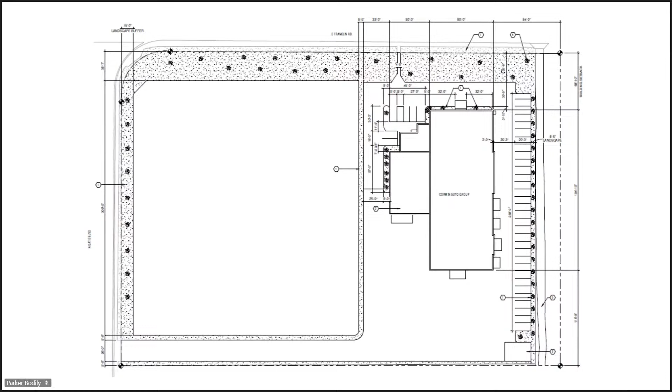I've already defined most of this for you, so I won't cover it again, but continuing on, performance standards - they're subject to our standard performance standards, which limit the amount of emission of smoke, fume, gases, etc. If they propose any additions to the building, it will go through design review.

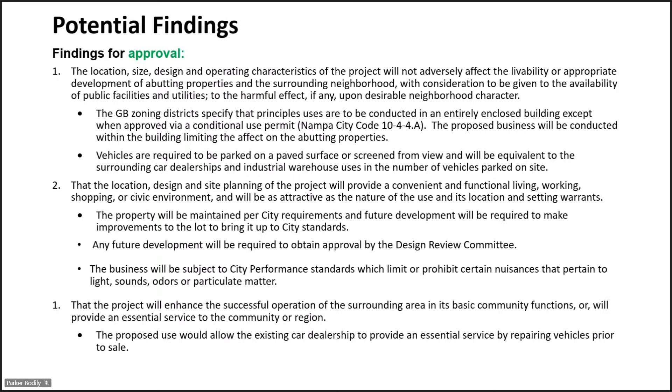The conditions of approval, as mentioned before, number 3, their proposed business will be restricted to the use described in their narrative provided in the staff report, which the applicant mentioned. The potential findings are in the staff report. Staff doesn't see any issues with the conditional use permit request.

Any questions? All right, we will move on to public testimony.

Karen, you have the sign-up sheet? Nobody signed up? Is there anybody here that would like to speak, or online, for, against, or undecided on this application?

All right, seeing none, I'd take a motion to close the public hearing. So moved. Second.

We have the motion to Cody. I didn't say anything. I thought you said something.

It's been moved and seconded to close the public hearing. All those in favor? Aye. Any opposed? All right, public hearing is closed.

What do you guys think? Seems like it.

Mr. Chair, I'll go ahead and make the motion. I move to approve the conditional use permit for automotive repair for Corwin Ford Automotive Reconditioning in a GB1 at 15970 Gate Boulevard, for Corwin Ford Family Real Estate LLC, with all the recommended conditions, and adopt the proposed findings as listed in the staff report. Second.

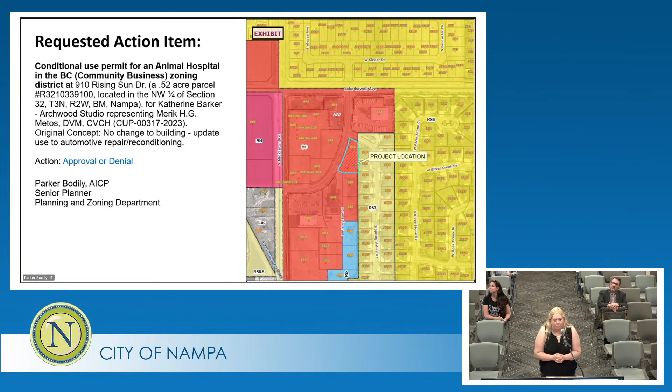My architect is online, she's not here today in person. What we're proposing is a small animal hospital, single level. I have been a veterinarian for 10 and a half years. I graduated from Garden Valley High School, so I'm an Idaho person, not from California or anything like that. I know a lot of people freak out about that, but this is my project, and I'll hand it over to Katherine, my architect, to talk about things.

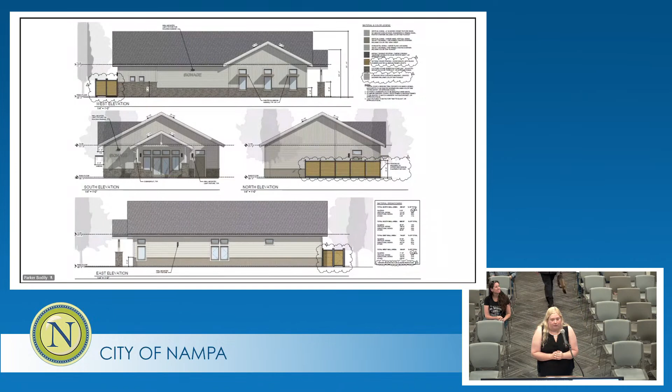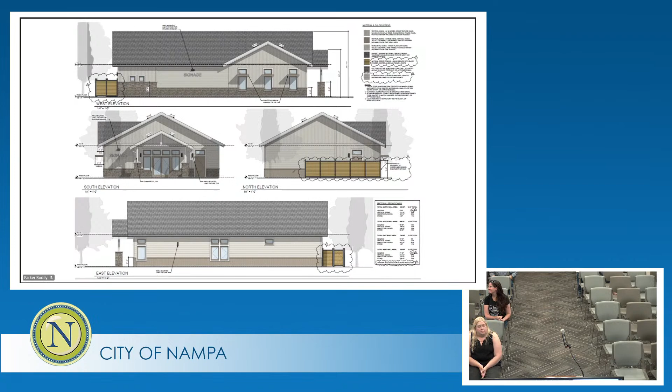Great, okay, thank you Dr. Metos, and thank you committee and chair for the time to present this project. Can you hear me okay? Yes, can you just state your name and address for the record please? Yes, my name is Katherine Barker, principal of Archwood Studio, presenting on the project at 910 South Rising Sun Drive for the Rising Sun Animal Hospital.

As Dr. Metos mentioned, this project is her local dream to open a veterinary hospital. The project is sited in the existing Fall River West Master Plan, and it's directly at the intersection of South Rising Sun Drive and South Spring Valley Drive. It's zoned for community business, neighborhood commercial, and it's an existing lot with parking and pavement in place. There was a project previously in review years ago, and the proposal is to build a new 2,700 square foot single-story building to provide services for 2 or 3 doctors for an animal hospital.

The conditional use permit application is a requirement because the current zone does not include an animal hospital, which would include x-ray services and laboratory services.

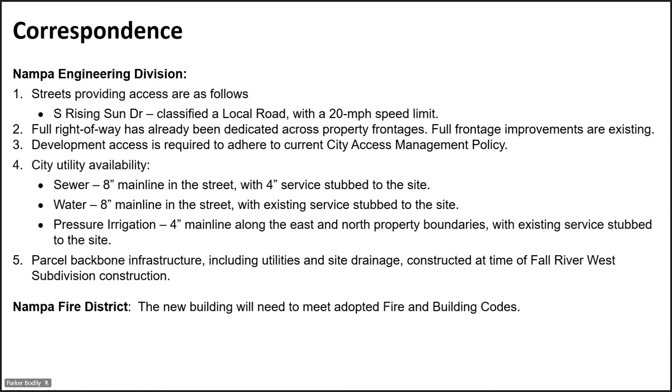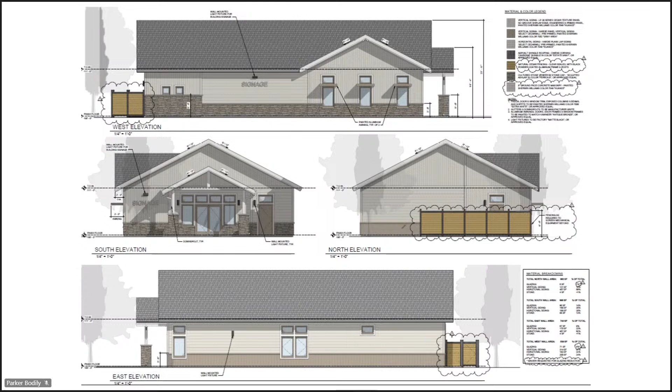The proposed use is defined in the narrative. They specifically call out not keeping animals overnight. They have designed the building to keep animal noises to a minimum by pushing those kennels to the far side. The applicant also mentioned the exterior area planned, which is being screened from view.

The land use designation here is a mixed use zone. We covered the performance standards with the previous application. It prohibits emission of noise, smells, perhaps, so if there's any concern for that, our code covers some of it.

The conditions of approval will mostly be taken care of at building permit stage when we review the building permit. But one thing to highlight, number 4, exterior spaces will need to be cleaned regularly, which seems like what the applicant is planning to do. It's probably good to highlight that this is a different use than a typical commercial kennel. This is a hospital, so those uses are a little bit different.

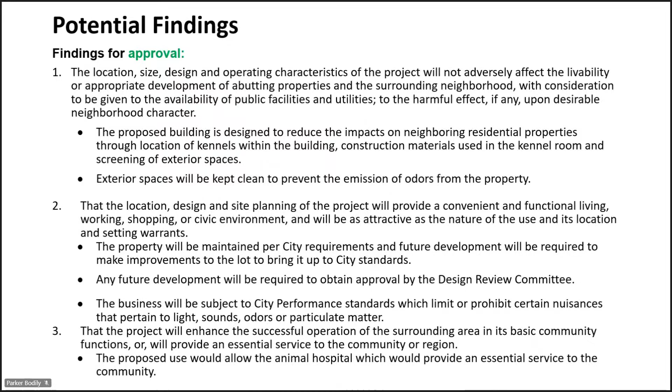The potential findings are in the staff report. There's a potential motion there for you. I'll stand for questions.

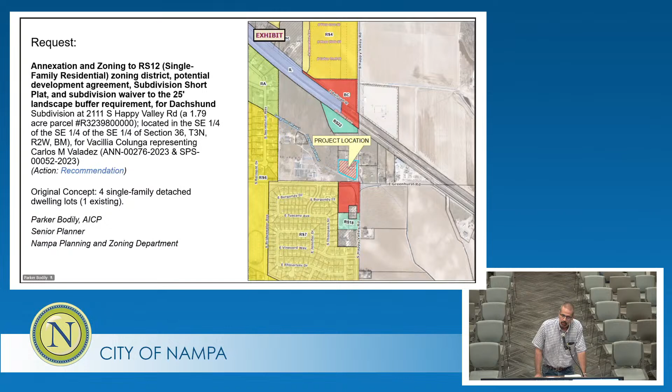Is the applicant here? I see the applicant. William Mason, not with Vacillia — Mason and Associates, 924 3rd Street South in Nampa. Vacillia is here, but I'm going to make some quick statements about the project, and then we can open it up and she can answer any questions. This is the northwest corner of Happy Valley and Greenhurst, next to the roundabout.

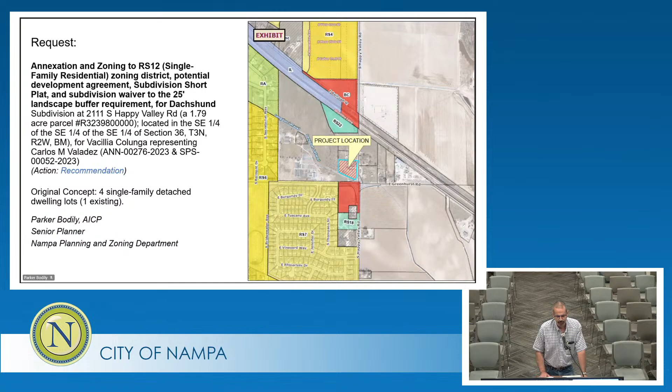It's a 1.79 acre parcel, and the existing house belongs to one of the family members, I think it's the father. The family would like to split the property into 4 so that they can live in a community there with their father.

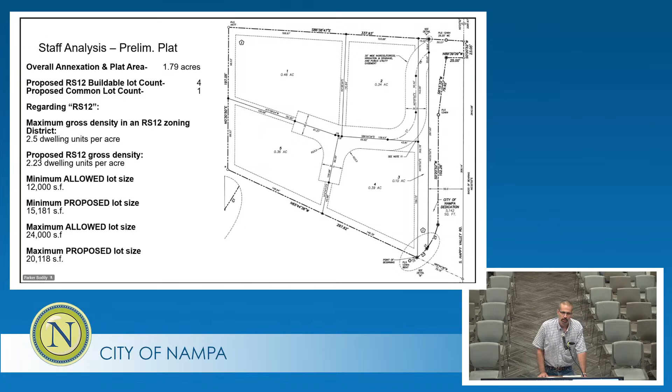So we're asking for an annexation and a zone to RS-12. Because of the location of the roundabout and the access we need for this project, we had to push the access to the far north of the property, and that actually has created a little bit of an issue with the normal required landscaping strip of 25 feet on that location.

So we're asking for a reduction on that landscaping buffer. I think that's probably everything I need to explain right now. It is a short plat, so we have turned in plans to the engineering department, and we don't have any issues with their comments.

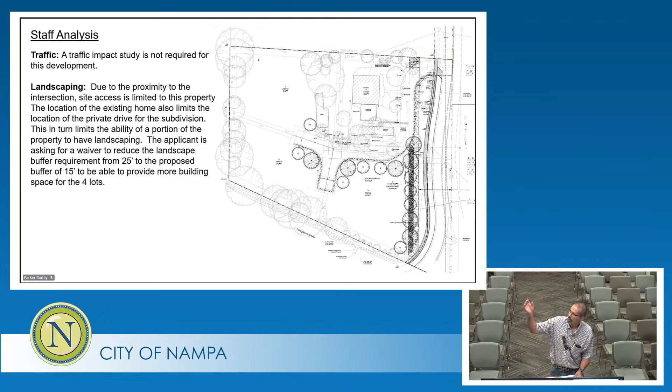So the waiver is just for the north part of the road? It runs the entire length, because to make the landscaping buffer uniform, we're running the strip to the south all the way through, as a 15-foot strip all the way there. Gotcha, okay.

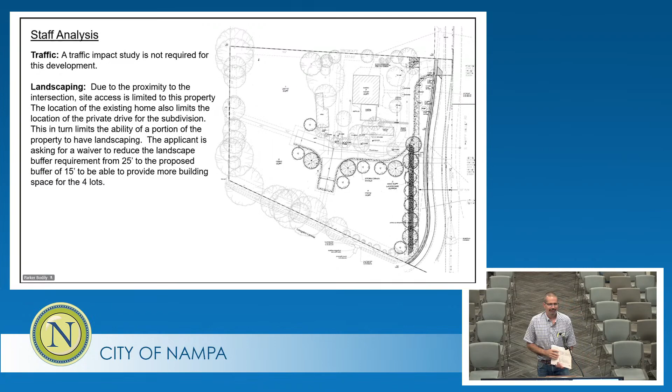We may have you back up. Ms. Colunga, do you have anything else you want to say, or do you want us to hear from staff?

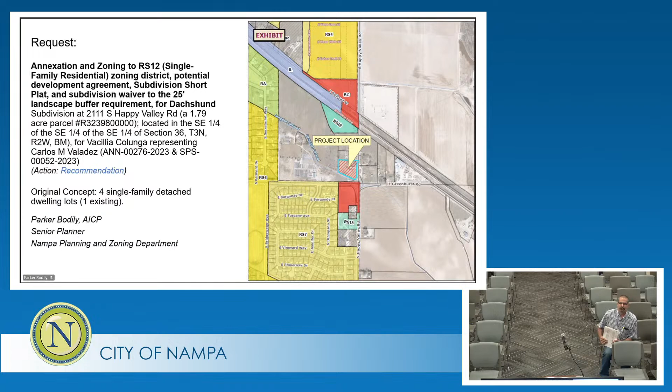Hi, my name is Vacillia. I'm just trying to develop my family's land. I have 4 siblings, and we're just trying to divide up the property so each one of us can get a portion. My dad's getting older, he's not going to be able to take care of it all, so he figured he'd just give it all to us and we inherited it. I'm just trying to make everything fair for my brothers and sisters and develop the land for everyone.

You're the lucky one. I'm the lucky one that gets to stress out with everything. Yes, yes, very lucky, let me tell you.

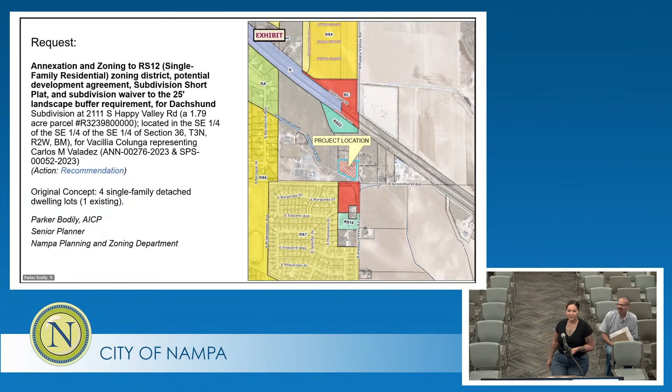All right, well, thank you. We'll call you back up if we have any other questions. Thank you, but I don't know who would have them.

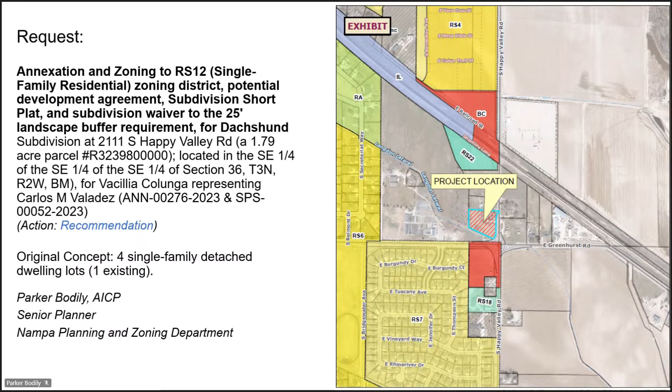Parker: Thank you, Chairman, Commissioners. So a few things happening here: annexation and zoning to RS-12, the short plat, and then the waiver request. The surrounding area is county to the north, east, and west, Adams Gardens to the west, and All Pro Lawn Services across the intersection.

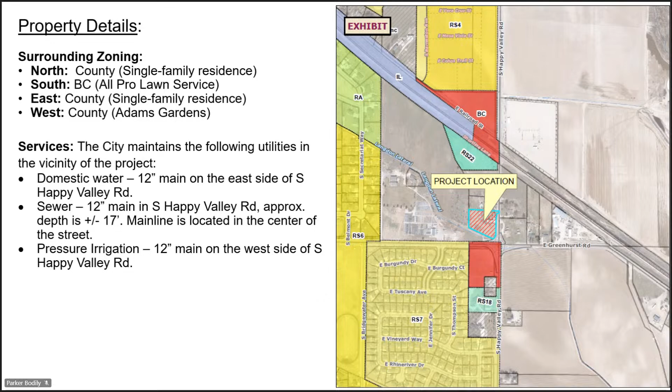The county correspondence, this is currently zoned agriculture in the county. It was divided in 1999 through the county. The irrigation district has an easement that's 40 feet, 20 feet on each side, along the south property line. The fire station 2 is 2.4 miles, a 7-minute response time.

And then the engineering comments had right-of-way dedication, comments on utility availability, and frontage improvements. If you have questions about that, Daniel's here to answer those questions.

Again, this is a predominantly low-density county with some commercial uses. Vineyard Point is the subdivision nearby on Greenhurst Road, that's RS-7 zoned. This is low density in the comp plan, and RS-12 fits within that low density.

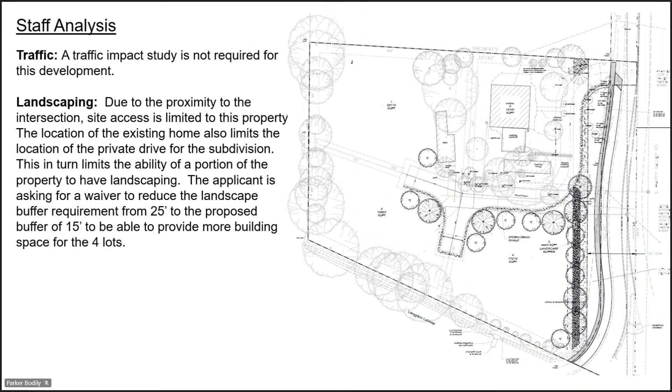The traffic impact study is not a requirement for this development, it's only 4 residential lots. Regarding the landscaping, as the applicant mentioned, the access to this kind of messes with the landscaping. Only a portion of it would be able to be landscaping, as that access is taking up most of the site, and so they are asking for a waiver to that. The typical requirement is 25 feet.

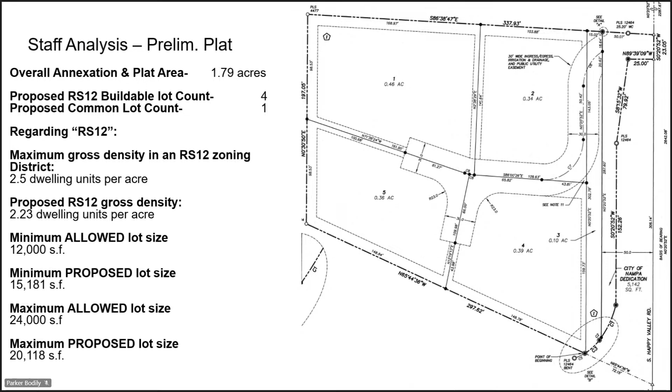The plat area is 1.79 acres. The gross density here is 2.23, which is below the maximum of 2.5. The minimum lot size is 12,000, they're proposing 15,181, and the maximum size in this zone is 24,000, and they're at 20,118 being the largest. So they meet the lot size requirements and the density here.

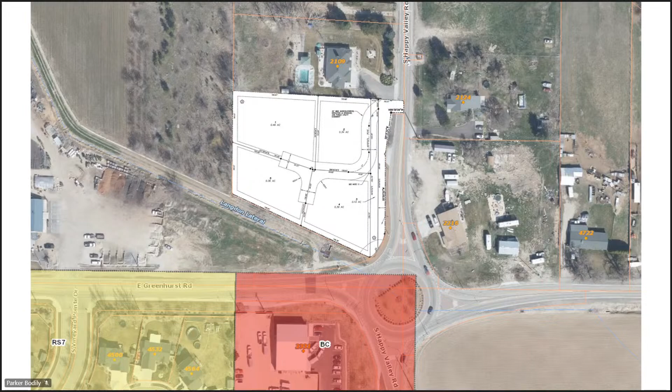Here's an overlay of the project showing the neighboring properties. The proposed potential findings here: all the landowners have consented, it's contiguous through the intersection to the south, and the proposed RS-12 meets the future land use designation of low density here. I won't cover all of these, but the zoning meets the comp plan, and the lot sizes are compatible with the zoning.

The conditions of approval, most of them are engineering conditions. The revised landscape plan would need to be submitted if the waiver were to be approved. There is an existing structure on the proposed lot 1. Staff is recommending a condition that the existing structure be used as an accessory to the existing residence. That's to prevent the subdivision, and then that shed shop being on a separate parcel, and them selling that to somebody to use as a commercial lot. That's probably unlikely to happen, but the conditions of approval will prevent that.